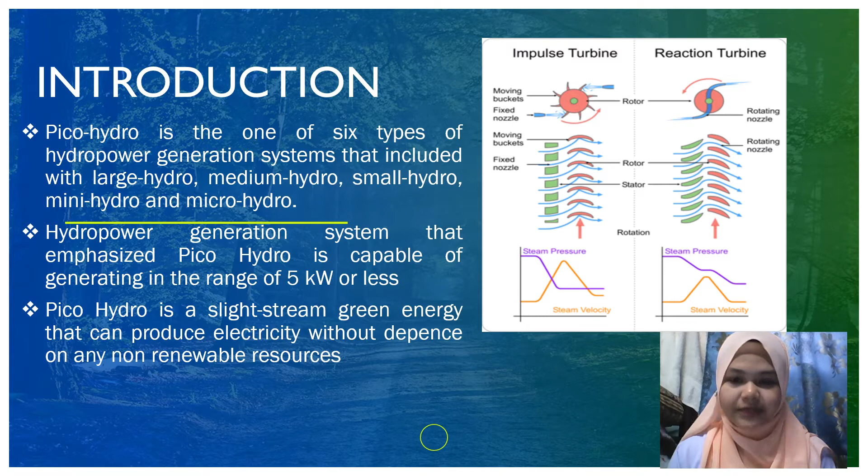For research background, there are 5 out of 100 research in literature review. The first one, introduction to the pico hydropower and the status of implementation in Malaysia. The author is M.F. Basar. He is finding the head and water pressure of the stream water. This parameter should match with the type of turbine used in the system.

The second, pico hydro system. The author is Gopal Reddy. He is finding that encouraging local entrepreneurs to use pico hydro as the source of power for a business, the technology can be more readily financed even in areas where development loans or subsidy are not available to rural people. Thirdly, pico hydro for cost-effective lighting is the writing from Arthur William.

He is finding only 20 watts is enough power to light a typical rural house. So, 2 kilowatts is enough to supply up to 100 households with electricity, with power available during the daytime for charging batteries or driving agro-processing equipment.

And then, an overview of the key components in the pico hydro power generation system. The writing by Muhammad Farid Basar. He is finding the heart of this system is a water turbine, and turbine selection is based on the availability of the head and flow of water resource.

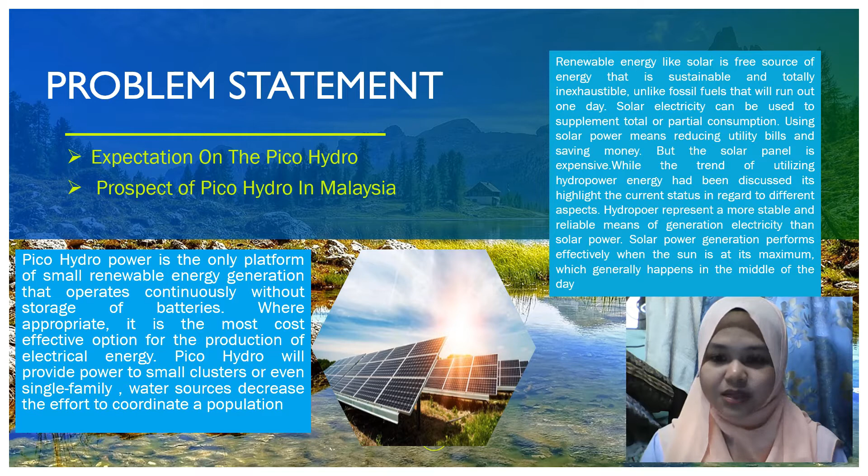While the trend of utilizing hydropower energy had been discussed, it highlights the current status in regards to different aspects. Hydropower represents a more stable and reliable means of generating electricity than solar power. Solar power generation performs effectively when the sun is at its maximum, which generally happens in the middle of the day.

There are 3 objectives in this study. Based on the title of this project, objectives for handling and inhibiting factors in developing pico hydro generation system in Malaysia are: to evaluate at least 100 reviews and articles of various advanced small hydro technology applied in Malaysia and abroad; secondly, to identify at least 7 main themes based on 100 papers using extracted feature work and case evidence from previous study.

Lastly, to develop a generalized reference model for pico-hydro technologies in Malaysia on the basis of driving factors and obstructive factors.

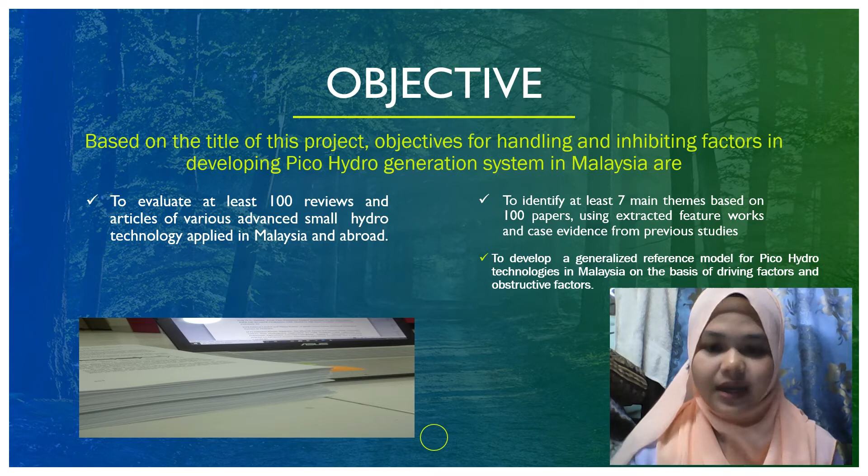For work scope, the 7 themes starting from A until G will be discussed in the report, using the descriptive work and case evidence from previous reports complemented by additional literature. Here is the theme categorized on 100 sources: theme A, community; theme B, resource potential; theme C, technology; theme D, economic; theme E, environment; theme F, RE policy; and the last theme G, political.

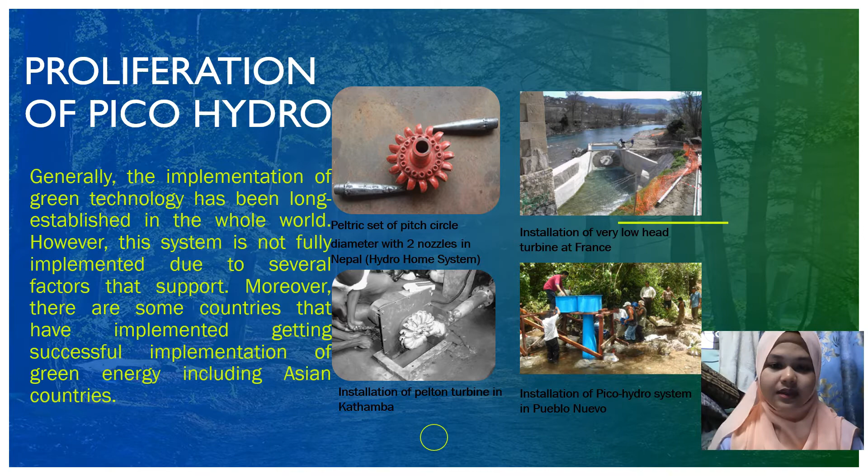For proliferation of pico-hydro, generally the implementation of green technology has been long established in the world. However, this system is not fully implemented due to several supporting factors. Moreover, there are some countries that have successfully implemented green energy, including Asian countries. There are examples where the technology has been used.

Next, pico-hydro in Malaysia. Nowadays, all small scale hydro in Malaysia originates from micro-hydro implementation, with installations in Sabah and Sarawak. Among the successful implementations are in Long Lawen, Sarawak, and at Terian and Bantul, Sabah. The Long Lawen project won runner-up in the ASEAN Energy Prize for Renewable Energy off-grid category in 2006. UKM has developed a similar application but within a smaller scheme.

Pico-hydro was chosen for the electrification program for remote area civilization. The first pico-hydro installation project is in Kampung Tuil, Kelantan. There are 2 other pico-hydro installations in Malaysia, at UKM Bangi and Sungai Udang, Melaka.

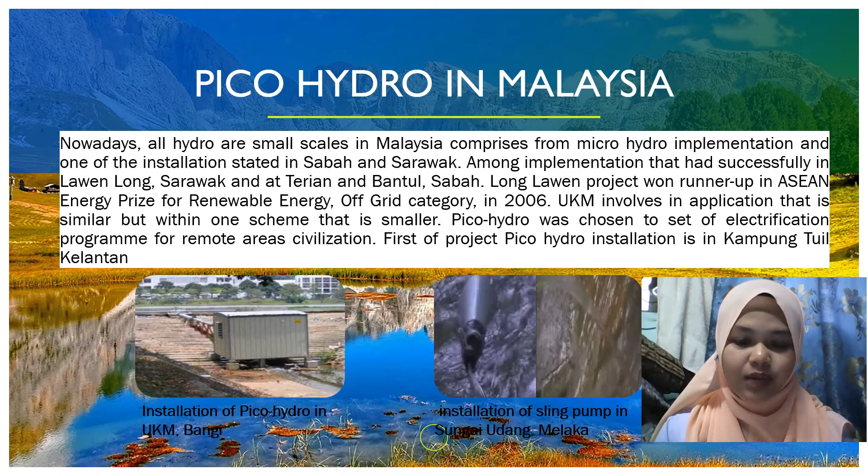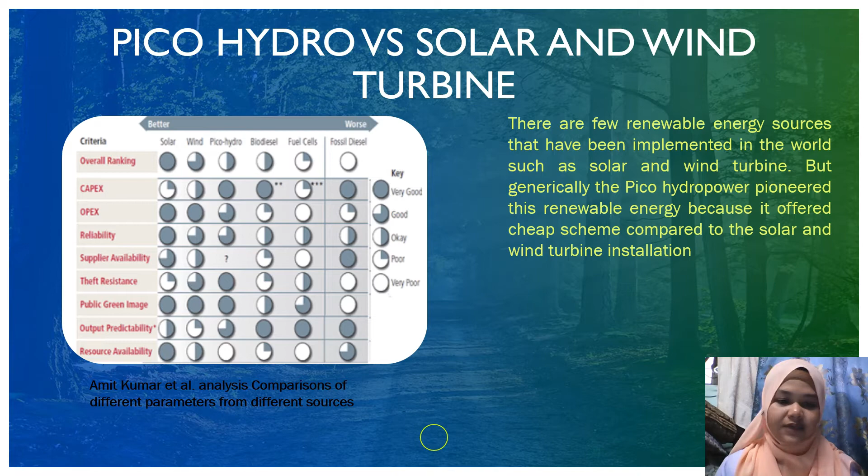Then, pico-hydro versus solar and wind turbine. There are few renewable energy sources that have been implemented in the world such as solar and wind turbine. But generically, pico-hydro pioneered this renewable energy because it offers a cheaper scheme compared to solar and wind turbine installation. As you can see, there is a comparison analysis of different parameters from different sources by Amit Kumar.

Moreover, for efficiency of water resource, pico-hydro technology implementation requires a constant source of energy to generate the turbine, which in turn is capable of generating up to 5 kW. However, the main source for generating this system is not only focused on small streams or rivers. Tidal barrage and tidal irrigation channels can also contribute as sources that can generate the pico-hydro system. Here is a model of a proposed barrage location with channel in Bangladesh and a floating water wheel in tidal irrigation at Telang.

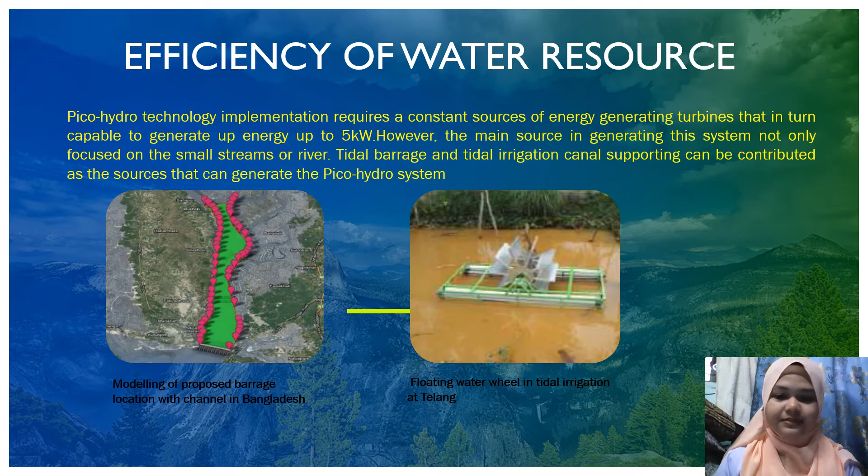Then, readiness technology. The basic pico-hydro system works where moving water flows through and spins the water turbine, which causes the drive generator to produce electricity. The water turbine can be divided into 2 types: reaction turbine and impulse turbine. Pico-hydro is usually classified as a water power generation system that produces below 5 kW of electrical power.

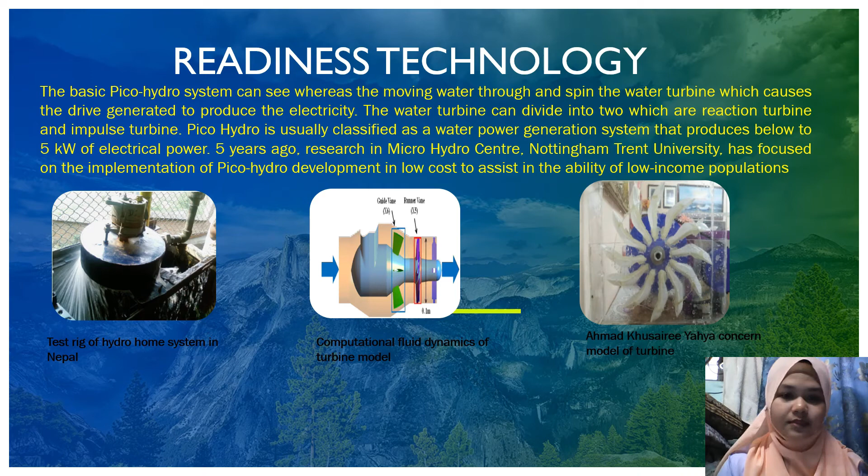5 years ago, research at the Micro-Hydro Centre, Nottingham Trent University, focused on the implementation of pico-hydro development at low cost to improve accessibility for low-income populations. These are 3 examples of readiness technology.

Next, for methodology. Fundamentally, this chapter will clarify the method used to accomplish the perfect result of the research. The effectiveness of this method will ensure the project progresses well. The methodology is essential to guarantee that the project will run smoothly and orderly to accomplish great results, using a systematic and theoretical analysis method to analyze a particular field of study that has been set.

We can also see the previous research of A.A. Lahimer, who identified 148 types of reports related to pico hydropower, consisting of a literature review section. Thus, the same method has been configured to figure out the objective of the research. It consists of theoretical analysis of the research to be studied and the principles related to the branch of study being conducted.

Therefore, this study followed a sequence, starting with the rules and so on, successively until the study was accomplished. There are 7 themes from A to G.

For theme A, community, closely linked to papers that involve community in the development of pico hydro systems. The contribution of pico hydro systems in the paper is also given accreditation and categorized as theme A for community. Then for theme B, resource potential.

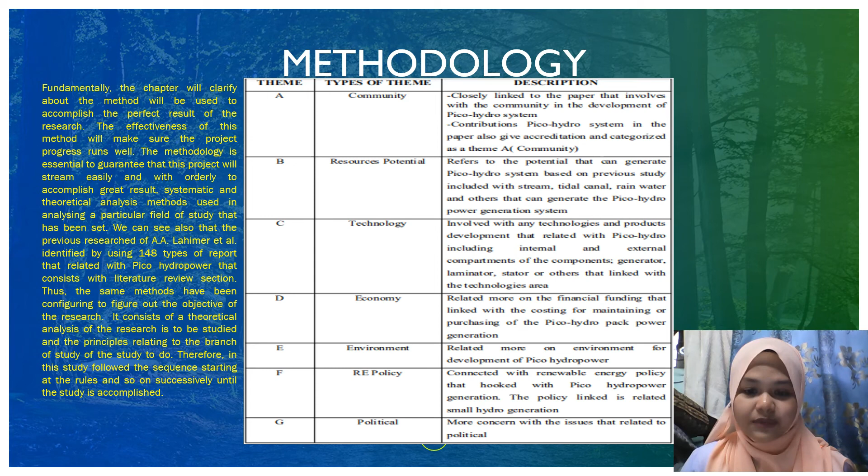For RE policy, connected with renewable energy policy that relates to pico hydropower generation, the policy link is related to small hydro generation. And the last theme is political, more concerned with issues related to politics.